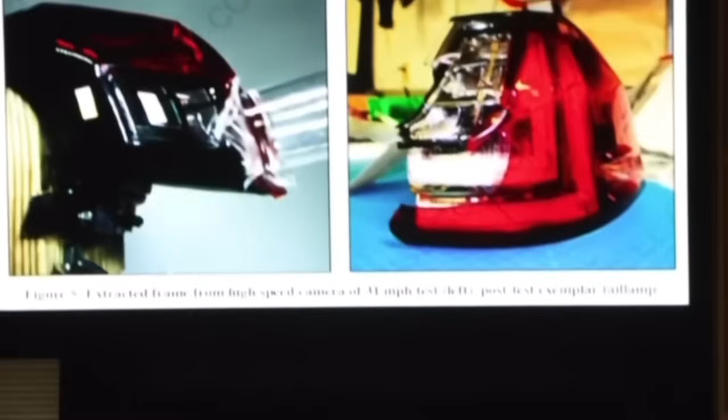Is this the photograph that was just marked as Exhibit 213 that's in front of you? Yes. Can you explain to the jurors what they're looking at? So on the left part, you are looking at a frame from the high-speed video just after the contact with the taillight. On the right, you're looking at the post-damage to the taillight after the glass had been fired into it. And if we could look at the next exhibit with the court's permission. Okay. And what are we looking at here? Same thing on the left. Again, this is the 37-mile-an-hour test.

The glass striking just in the area where the bottom of the turn signal indicator is, so right where it meets the red portion of the lens and the clear portion of the lens. That's about where the impact point was. You could see that a large portion of the outer red assembly, lens cover is missing and fractured. The clear portion of the outer lens to the turn signal indicator is also fractured, as well as the underlying clear diffusers in that assembly.

Would your testing in both of these scenarios, the 31-mile-an-hour test and the 37-mile-an-hour test, represent an accepted methodology for controlling for aim, velocity, impact site, and those issues, if you will, as it relates to testing of this sort? Yes, we were able to control those variables. And is that an accepted methodology in the area or the field of accident reconstruction?

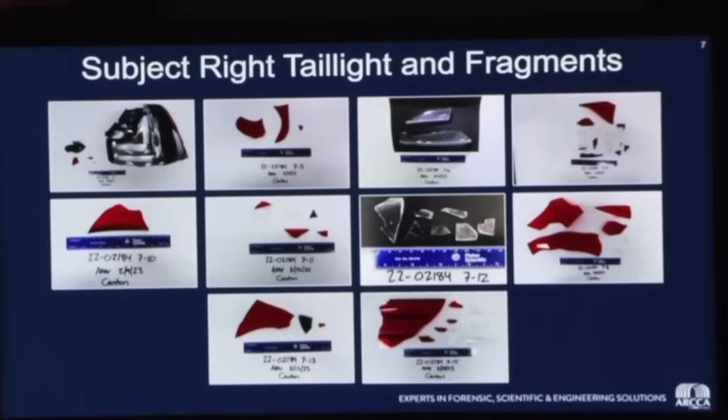What are we looking at here? This is a collection of photographs that depict various fragments from the right rear tail lamp assembly of the Lexus. And I will note, and I'll try to spotlight it, there are a few fragments in this photograph that are glass fragments, which, as I discussed earlier, there's no glass in the taillight, so these did not originate from the assembly. But altogether, from what I recall, there's about 50 fragments, I believe, that were counted, maybe a little less than that, from the right taillight. If we could go to the next slide, please.

What are we looking at here? So these are photographs depicting the sweatshirt or hoodie that Mr. John O'Keefe was wearing on the night of the alleged incident. And what was the role that this played in your analysis, ultimately? Well, one of the things that I noted, and I can go to the next slide, is there were a series of small punctures or holes in the sleeve, on the right sleeve of the sweatshirt, in varying sizes. I think some as small as just a few millimeters. Again, I think there was maybe 10 or 12, I recall, on the right sleeve of that sweatshirt.

If we could go back to the larger photo, the previous slide, do you see the right sleeve denoted on the photograph to the right? Yes. In your review of these photographs, what was the significance of the triangular arrows or markers? I believe those were to annotate or draw attention to those holes. Okay, the defects in the right sleeve? Correct. Can you count those for us, please? On the photograph on the right, I believe I see a total of 9. And what about the photograph on the left, just the right sleeve area? 9 as well.

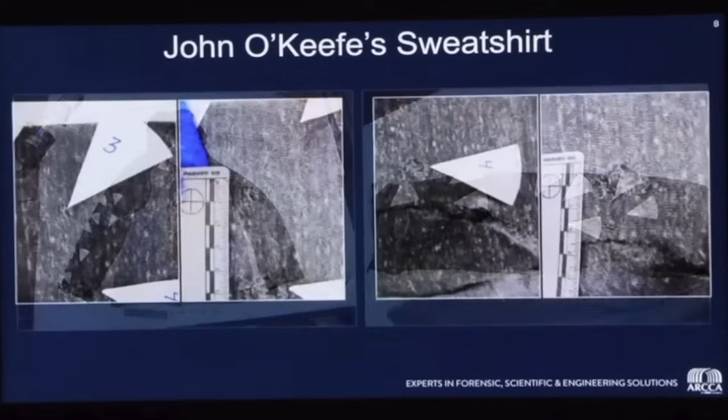If we can go to the next slide. What are the arrows pointing to in these photographs? So this is basically the previous shot, but what appears to be close-ups of some of those evidence markers. You indicated some of the sizes. What were some of the smaller sizes of those defects or holes? From what I recall, I think it was around 3 to 5 millimeters for some of the smaller ones. How big is 3 millimeters in inches? It'd be probably around an eighth of an inch or so. Can we go to the next slide, please?

What are you describing when you write the word fundamentals? So I want to discuss some very basic concepts that I hope will resonate as we go through the PowerPoint so that you have an understanding of the underlying physics. Can you describe the role of an accident reconstructionist and the fundamentals that an accident reconstructionist undertakes when performing the kind of testing that you performed? As I mentioned earlier, a simple definition of accident reconstruction is the application of physics and engineering to collision events. So I want to go through some very basic elements of that so that you have an understanding of the physics. Can we go to the next slide, please?

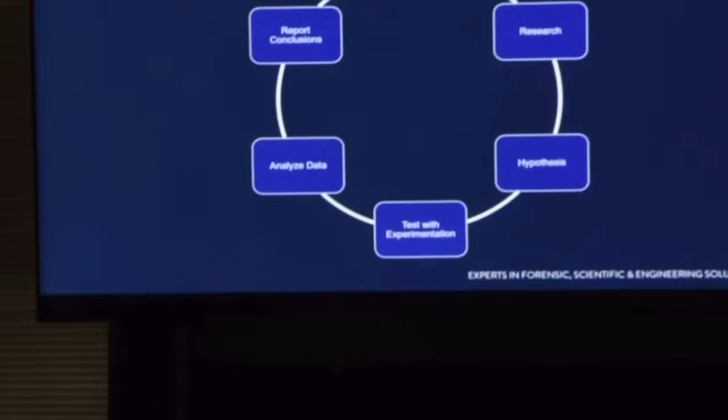You could think about it in this case, we make an observation. We have injuries to the arm, we've got a damaged taillight. So let's try to do some research to figure out, has anyone done testing with that? Has anyone hit an arm with the taillight, see what happens, see what the forces are? And then we start to make a hypothesis, kind of an if-then statement. If the arm contacts the taillight, does the taillight break? Does it not break?

What's the hypothesis there? And at least my understanding of reviewing Dr. Welcher's work, it appeared to be that his hypothesis... Sustained. Next question. Did you review... well, let me ask a different question.

Going back to the calculations previously, the delta V, the acceleration, the force calculations that you described to the jury, did you see anywhere in any of Dr. Welcher's reports or his data that he undertook those core calculations? No.

With regard to the scientific method, did you see whether or not Dr. Welcher followed this scientific method as you're explaining it to the jury? Sustained. What did you note, or what opinions or conclusions did you come to about the scientific method, if any, that Dr. Welcher did or did not undertake? Sustained.

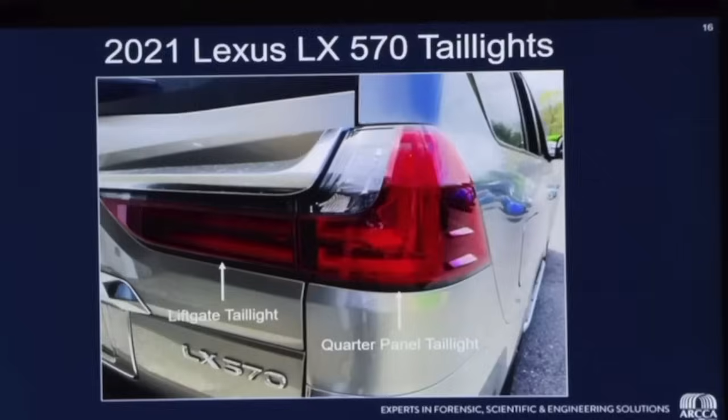And ultimately, what testing did you undertake specifically as it relates to this particular vehicle? We did full-scale vehicle testing with the vehicle driving into an ATD arm, as well as an ATD arm attached to a dummy, and then a full-on impact to a test dummy. Did you assess the damage to the right taillight after these various tests? Yes, after all of the tests. Did you assess the acceleration and quantify the forces that were involved?

Did you assess the material and textile damage to the clothed ATD? Yes. Ultimately, did you conduct lab tests in an effort to answer some of these questions as well? Yes. And you've already mentioned this, but you utilized in your testing the exemplar vehicle to the fullest extent that you felt necessary? Absolutely, yes. Were you hampered or hindered in any way in terms of damaging the vehicle or utilizing the vehicle in any way that you wished? No.

Let's go to the next slide, please. What are tests A and B? What are those laboratory tests? So these were the initial two tests that we did to get an idea of starting to test this hypothesis. As I mentioned, we weren't sure at 10 miles an hour what would happen to the taillight. We wanted to see what would happen at 17 miles an hour with the arm. So again, it was to evaluate from a starting point what happens in this interaction based upon how Dr. Welcher had his arm oriented in his PowerPoint and analysis.

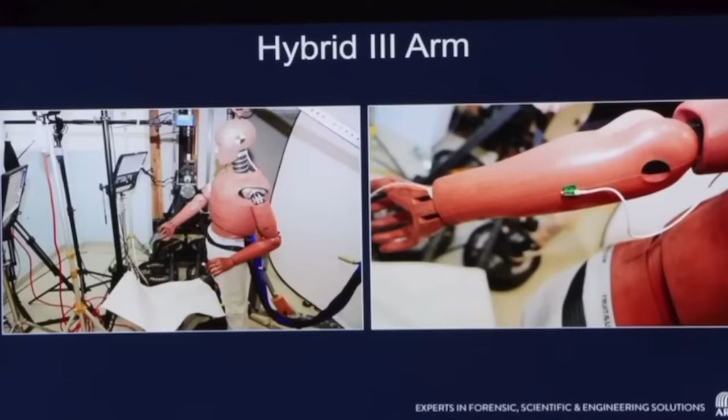Does that accelerometer put into motion some of the mathematical formulations that you talked about earlier? Yes. Let's move to the next slide, please.

Tell me about these photographs. The importance of this, more specifically looking at the right photograph, might be a little hard to see, but we wanted to get the same exact sweatshirt or hoodie for the testing to evaluate if the taillight breaks, is there a mechanism for the fragments to penetrate and cause holes in the sweatshirt as were observed in Mr. John O'Keefe's sweatshirt?

Next slide. Were you successful in finding the exact replica sweatshirt? Yes, and I will note the material blend on the sleeves are the exact same. They are 60% cotton and 40% polyester.

Was it important in your mind to maintain consistency with the data you had received concerning John O'Keefe's clothing? Certainly. I think we wanted to try to control as many variables as we could. Let's move to the next slide, please.

Test A. Describe Test A for us, please. You're going to see a series of photographs and then videos, but Test A was mounting a preconditioned taillight on that linear impactor to accelerate it into the Hybrid 3 arm, again to evaluate the damage to the taillight and the acceleration to the arm. Let's move to the next slide, please.

So what I did is I analyzed the profile of the temperature down in this area. When we look at that segment, that lower portion where contact was made, the average temperature in that area was about 34 degrees with a minimum of about 33 degrees.

How did you get that exemplar taillight down to around freezing? All of the taillights that we tested were preconditioned overnight in a freezer. Why was that important? It's my understanding that at the time this allegedly occurred, the ambient temperature was 31 degrees Fahrenheit. As I mentioned earlier, there's a correlation between how plastics perform in cold weather, so we wanted to take that variable into account and precondition them down to temperatures consistent with the time of the alleged incident.

Next slide, please. What are we looking at in this photograph? This is a video. Do you want me to go ahead and play the video? Tell us what we're about to see, and then I'll ask the court's permission.

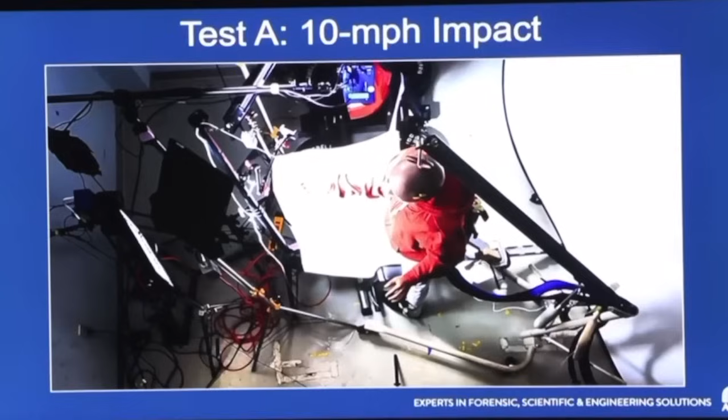You're looking at a camera mounted above the entire setup. If you look at the top portion of this video, you will see the taillight, part of it covered by the high-speed camera. What will happen is the linear impactor will fire, and the taillight will be accelerated up to 10 miles per hour, striking the clothed ATD arm. With the court's permission, let's go ahead and play the video.

Next slide, please. What is this? This is also a video, but with the high-speed camera, looking top-down at the arm. You will see, when the video plays, the taillight enter from the left and contact the arm. I will note this is essentially slow motion, so it's not happening in real time. You'll see the taillight slowly moving, but it's actually in reality moving at 10 miles per hour. Understood. Go ahead and play that.

Can I ask a question now that that's played? How did you mount the taillight to the linear accelerator? We had to get a little bit creative there, as you may have observed when we had the physical assembly out earlier. The back of it isn't a clean surface we could just bolt on. So we 3D printed a bracket that we could bolt onto the linear impactor, and used a polyurethane expanding foam to marry those two together so we could bolt it onto the linear impactor for this test.

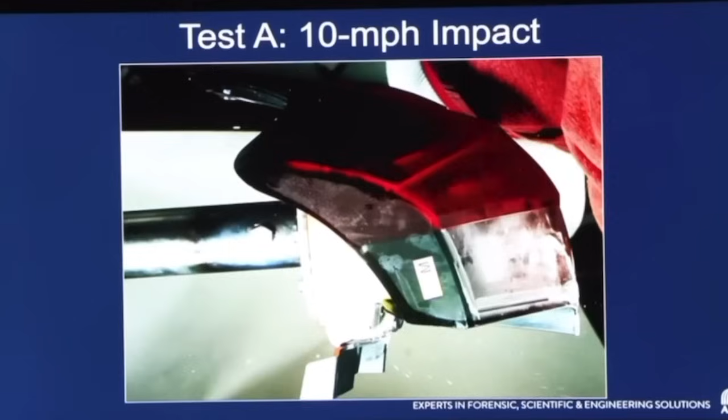Did you see any debris from that foam mounting mechanism? Yes, there are a few flakes of that polyurethane foam off the backside that got dispersed. With regard to this particular 10-mile-an-hour test, what did you note in terms of damage to the taillight? It was very minimal. What about any damage to the hoodie? There was none.

Can we go to the next slide, please? What are we looking at in this slide? This is looking at a side view, same test, just from the side. Similarly, you'll see the taillight come from the left and impact the arm. If we could play this, please.

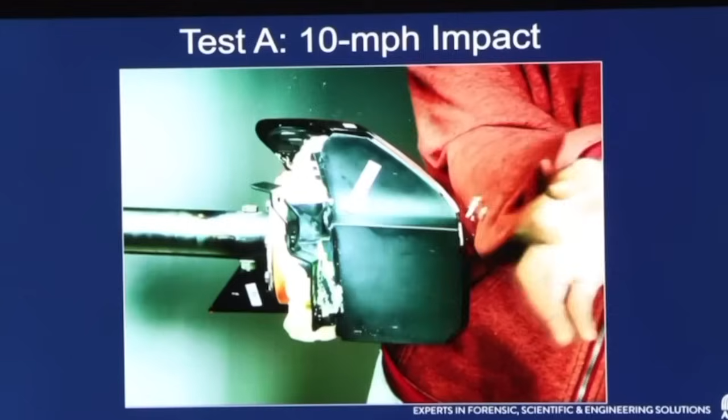What did you note in terms of deflection of the test arm? The arm essentially, and we'll see this in the data later, reaches a common velocity with the taillight. Based upon the portion of the arm that was contacted, consistent with how Dr. Welcher has it oriented, it will become accelerated up to 10 miles an hour roughly. Over approximately what period of time is that arm accelerated up to 10 miles an hour along with the taillight? We'll see it on the data plots. I think it's about 10 milliseconds or so.

How long does an eye blink on average take? Off the top of my head, no, I don't know. Probably pretty quick, somewhere around 250 milliseconds. Does that sound right?

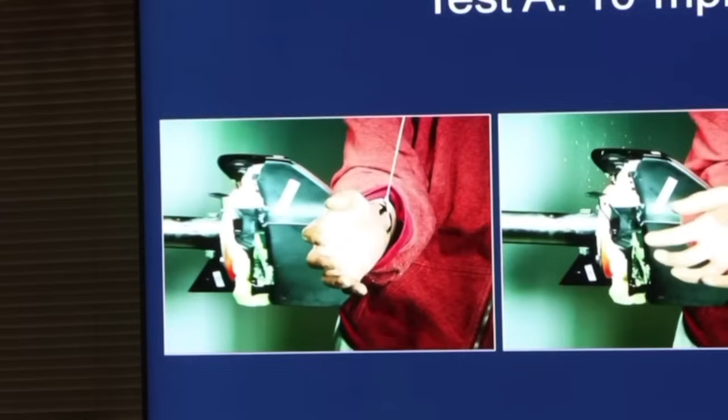Let's move to the next slide, please. What are we looking at in this series of photographs? These are extracted frames from the high-speed video we just saw on the previous slide, showing just at contact, just after contact, and then post-contact, so you can see the kinematics of the arm and how it is moving.

How would you describe the damage to the taillight in the 10-mile-an-hour test? If I may go to the next slide, I think it might help. This was the totality of that damage at 10 miles per hour. So I would describe it as minimal and superficial.

Do you hold that opinion to a reasonable degree of scientific certainty? Yes. As well as the former opinion you just gave us? Yes. Next slide, please.

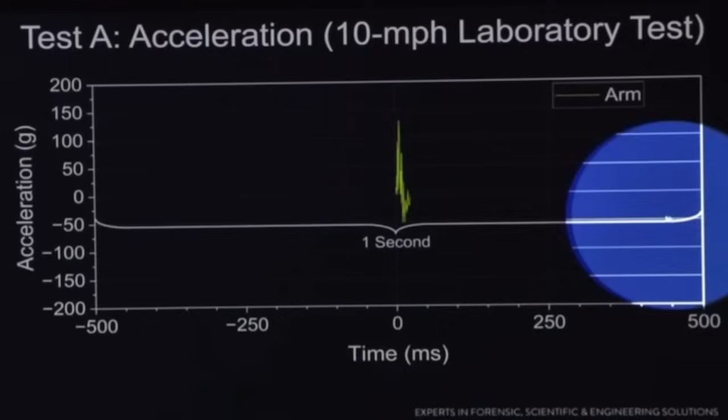So if we go 500 milliseconds to the right, 500 milliseconds to the left, this whole graph represents 1 second in time. This impact duration is occurring very quickly. Is that 1 second reflected from the beginning of the graph to the end? Correct, starting at this y-axis all the way to here is 1 second in time, with our impact duration happening over just a few milliseconds. And this was at 10 miles an hour? Yes.

And what does that mean? What is a G? A G is acceleration due to gravity. So if we're being held down by 1 G, you could think of it as basically a multiplication factor—it's 131 times the acceleration due to gravity.

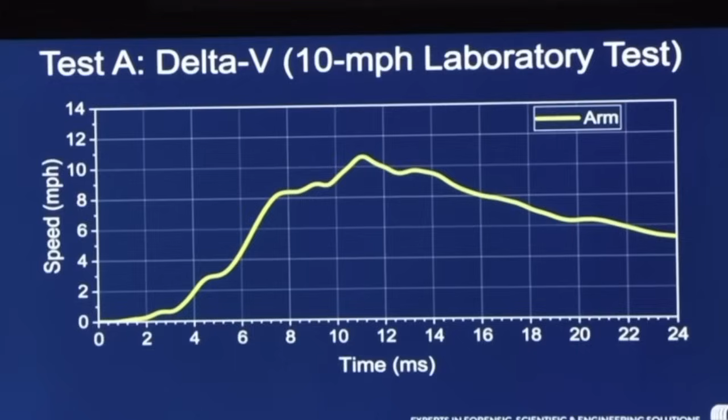And 131 times the force of gravity is exerted on the arm at the same time? Sustained to that point. Where does gravity play into this—what is the 131 Gs, where's that force exerted? That is the acceleration the arm experienced as a result of that impact—that's how quickly it was changing in speed. Understood. Let's go to the next slide.

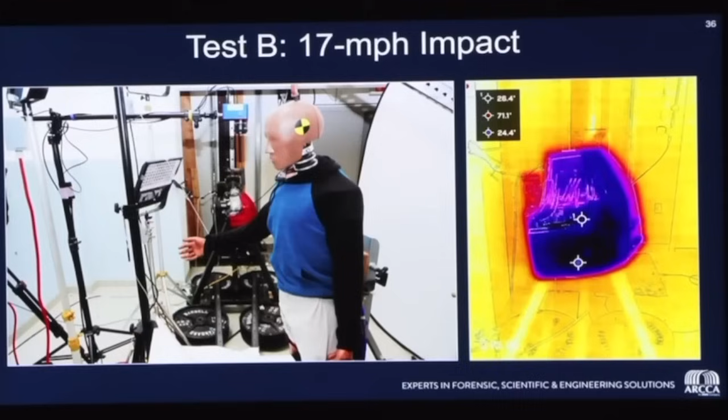And the ATD, the test dummy, if you will, is it also clothed? Correct, yes. You may notice a difference in the sweatshirt color. We put on a new sweatshirt in this test. Was it also an exact replica of the sweatshirt at issue worn by John O'Keefe? I'll ask it a different way. How did it compare to the sweatshirt that was worn by John O'Keefe? It was made by the same company and had the same material blend as the previous test and the one that Mr. John O'Keefe was wearing.

Next slide, please. What are we looking at here? So this will be a video. You will see, much like you did in the other one, where the taillight will be accelerated up to 17 miles an hour, impact the arm. And one of the things you'll see is actually an artifact of the test, if you will, where the taillight, due to the fact that the impactor stops at the end of the stroke, that force actually causes it to decouple from that polyurethane foam that we use to adhere the two.

What do you mean by decouple? What does that mean? So, as I mentioned, once the linear impactor reaches the end of its stroke, it stops instantaneously, and the force of that stop just caused where we adhered the two together to detach, basically break away. So, in essence, it doesn't matter because we only care about that short duration of time, that 10 milliseconds. So, once it breaks, it's already reached a common velocity to the taillight. Okay. Can we go ahead and go to the next slide, please?

What do you note about this impact? So one of the things you'll see is kind of that dust cloud. Again, that's all the particulates from the expanding foam that we use. So that's kind of what you see in the background there, going over the arm and the taillight there. Do you note more damage or less damage to the taillight at 17 miles an hour versus the 10 mile an hour test? There is more damage, yes. Let's go to the next slide, please.

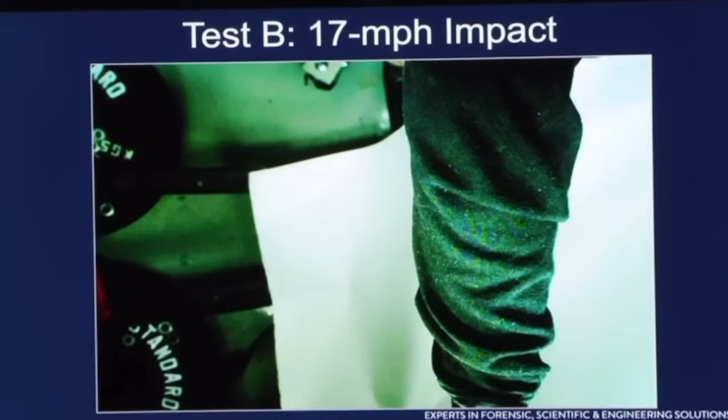What are we looking at here? So you're looking at a top-down view from the high-speed camera. You'll see the taillight enter from the left, impacting the arm at about 17 miles per hour. Okay, go ahead and play it.

Can you describe the decoupling that's shown here? Absolutely. So as you can see where the two are basically married together, right? It's kind of actually coming back together now. So that bond that we had, this is the most effective way that we could mount it to the impactor. It just became detached due to the force of that impactor stopping at the end of the stroke. Understood. Next slide, please.

What are we looking at here? So in this slide, you're looking at another high-speed video. This is just a side view. Again, you're going to see the taillight enter the frame from the left, impacting the arm at 17 miles per hour. Is this in slow motion as well? This is in slow motion, correct, not real time. Okay.

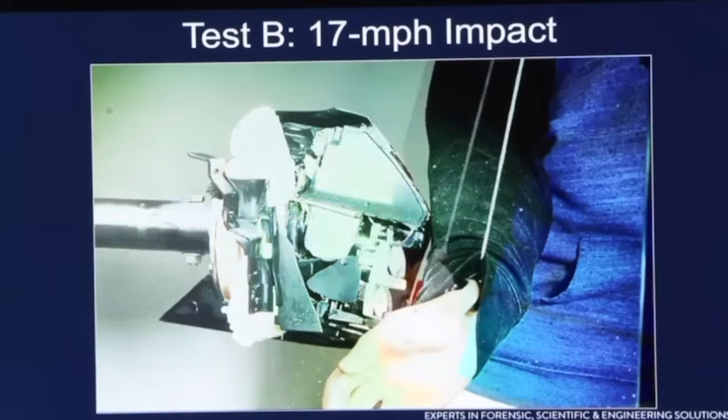What do you note in terms of the deflection on the arm? The arm, as we saw in the previous one, is accelerated up, so it's moving now at roughly a common velocity with what the impact speed was. And what did you note about the damage to the taillight? It was more significant than the 10-mile-an-hour test, where there was very minimal damage; several fragments of that red outer lens fractured as well as the clear lens. Okay, next slide.

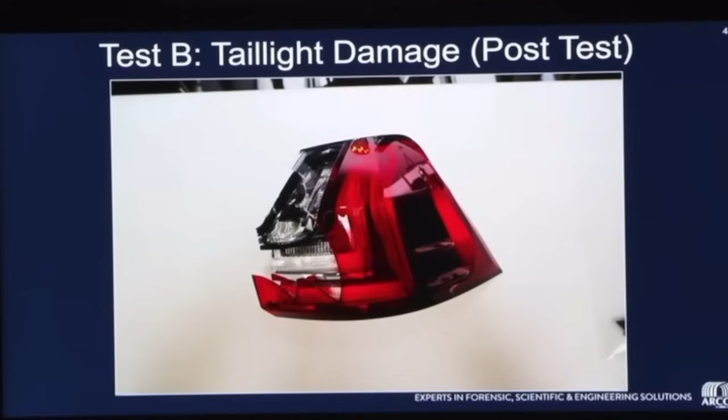What is this a photograph of? This photograph is depicting the damage to the taillight at the conclusion of the test, where, again, it's missing fragments of the outer red lens. I will note that the interior diffusers and plastic components are intact in this test. When you say intact, what do you mean? They are not damaged or broken. At all? Correct, at all.

And I'll point out one other thing just because you can see it in the photograph. This is that 3D printed bracket that we used to bolt it onto the linear impactor with the foam on the other side that mounted it to the taillight. Thank you for that. Next slide, please.

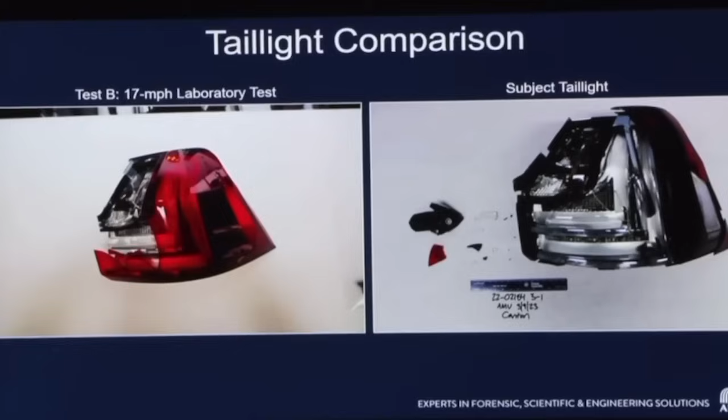What is this a picture of, or pictures of? This is a side-by-side comparison showing a depiction of the 17-mile-an-hour test impact to the test taillight, comparing it to that of the subject taillight. Were you able to reach any conclusions or opinions as to whether or not the damage to the subject taillight on the right is consistent with striking an arm at 17 miles per hour? It's inconsistent from a damage perspective. What's the basis of that opinion? The test that I've just showed you all.

Was that testing that we've just talked about conducted in accordance with the scientific literature and generally accepted methodologies that you've earlier described? Yes. Is the damage to the right rear taillight consistent with striking John O'Keefe's arm at 17 miles per hour? No. Do you hold that opinion to a reasonable degree of scientific certainty? Yes. Slide 45, please.

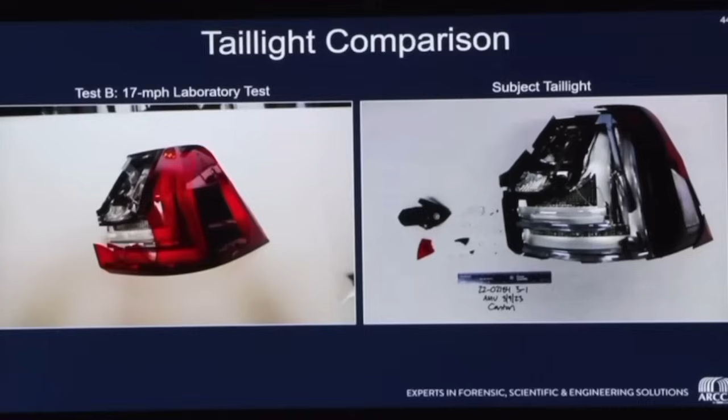Based on this testing that you conducted in this case, is the damage that you saw of the shirt that John O'Keefe was wearing consistent or inconsistent with the shirt that's on the ATD? It was inconsistent compared to the sweatshirt that Mr. John O'Keefe was wearing. Based on that, do you have an opinion or a conclusion as to whether or not the damage on Mr. O'Keefe's clothing was consistent with being struck by the right rear taillight at 17 miles per hour? It is inconsistent. Next slide, please.

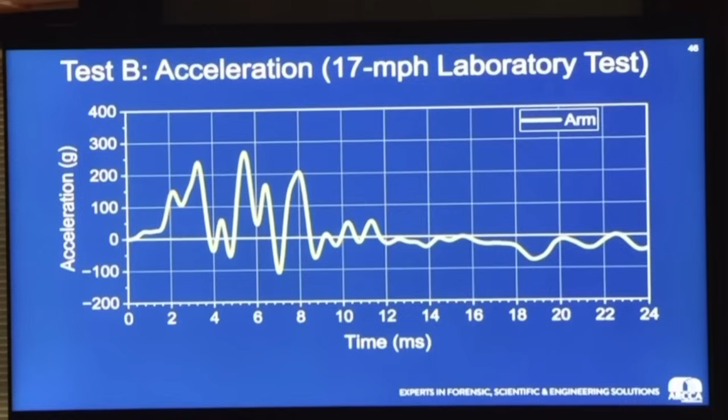Did you conduct additional tests other than the 2 lab tests that we've talked about? Yes, sir. Describe just in general, and then we'll talk in more specifics. What were the tests that you undertook after the lab tests? So we conducted 2 tests with a suspended ATD arm that was impacted by an exemplar 2021 Lexus LX570. We then conducted a test where the arm was then attached to a test dummy, and then our final test was a full-on impact to a test dummy. Can we go to slide 48, please?

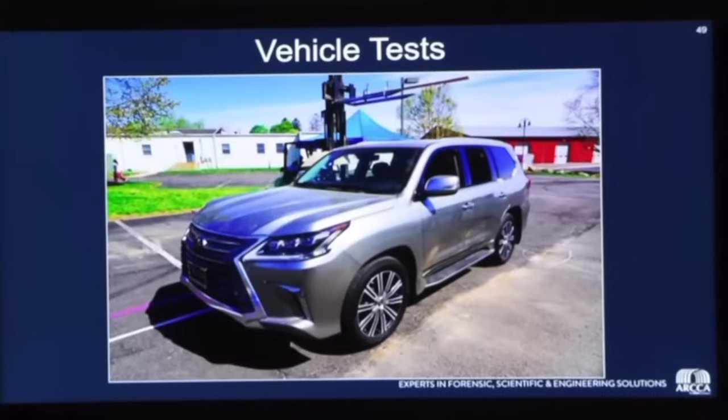What are we looking at in this slide? This is the exemplar 2021 Lexus LX570 that was utilized during this test program. Was this the same vehicle that was utilized in all the tests, C, D, E, and F? Correct, yes. If we could go to slide 49, the next slide.

What's depicted in this photograph? Well, there's a number of things here, so I'll try to point them all out. Obviously, we talked about just now the Lexus here, the exemplar vehicle. We have a forklift that was hoisted up that ultimately was suspending the arm. I think I have an additional photograph that shows it close up. But the arm was suspended from the forklift at the correct height to interact with the taillight.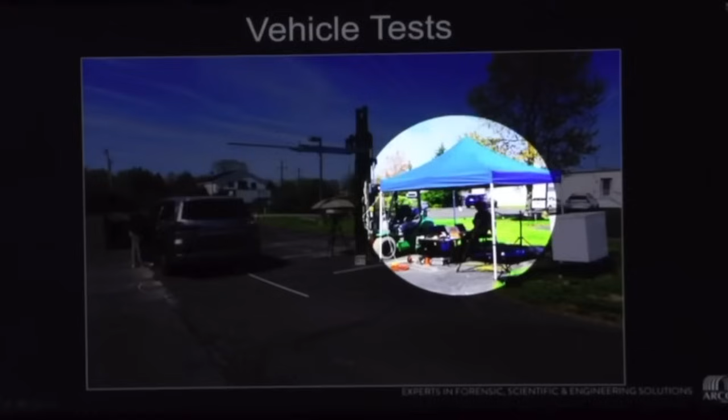We have our high-speed cameras set up under this umbrella. There's another one over here. Another thing you'll note is we brought out the chest freezer when we were installing these in the Lexus to, again, keep them at that steady state temperature for as long as possible. If we could go to the next slide, please.

What are we looking at in this photograph? So this is the approximate position that we plan to have contact occur in these tests. As you can see, the forearm is in contact with the lift gate and the quarter panel taillight along with the elbow. Why did you choose this configuration for the arm, the forearm, the hand, the elbow? It was based upon my review of Dr. Welcher's work, that he did through his static and dynamic test or paint test, that this is how the arm was roughly oriented when the alleged contact occurred.

What were you trying to replicate in positioning the arm this way, as it relates to the SUV? Well, as I stated earlier, it was to understand, let's get beyond just simple geometry, aligning things. What happens to the arm, right? What are the accelerations? What's the damage? We want to answer some of those other questions that Dr. Welcher didn't answer.

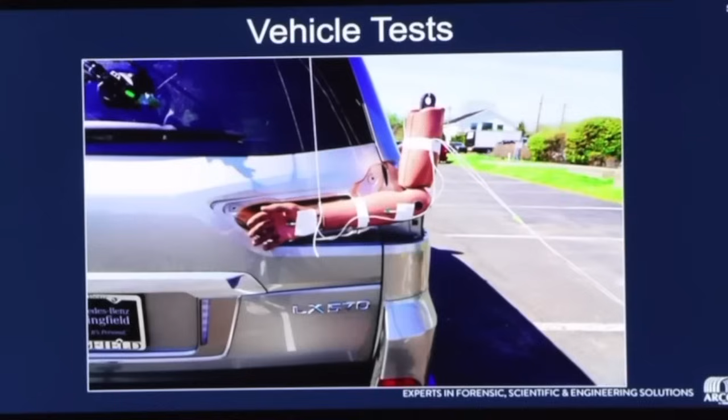Does this... So I'm going to strike the last part of that answer. Does this configuration align with your understanding of Dr. Welcher's alignment of the arm as it relates to the vehicle? Okay. Sustained. May we approach, Your Honor? Yes. Thank you, Your Honor. May I inquire? Yes. Okay. Let's go to the next slide.

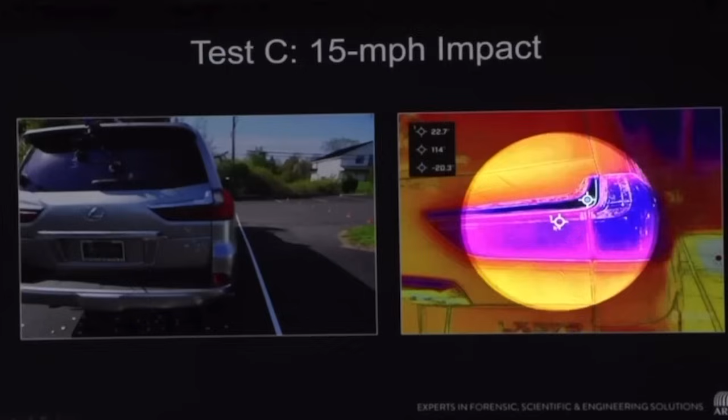It's maybe self-explanatory. What was the speed of your first test out in the field? 15 miles per hour. Next slide, please. What are we looking at in these 2 photographs? On the left is a photograph of the installed preconditioned taillights just after the install, and on the right is a thermal image of that. And if I may just point out with the temperature, one of the things you may see here is that due to the reflective chrome, this is just an artifact of that being really reflective. When we look at the average temperature profile of the taillight for this test, the average was approximately 17 degrees Fahrenheit.

Was it important in this testing to account for the temperature variance of the taillight assembly? Yes, absolutely. And we certainly strive to maintain that. One of the things you may see in this photograph on the left are these pellets on the ground, and that is due to the fact during the installation process, one of my colleagues was positioned adjacent to the taillight fixtures, applying a compress of dry ice to help mitigate any heat transfer during the install process. Let's move on to the next slide.

What are we looking at in this overhead view? It's a drone video, so you're going to see the Lexus accelerate from left to right, impacting the hybrid suspended arm in the area where you could see the umbrella. Can you use your spotlight and orient us? Where are the vehicles and the testing locations? Yes. The Lexus is starting here. You will see it accelerate in reverse with the hybrid arm suspended in this area here. Okay. Is this a video or just a still shot? This is a drone video. Let's go ahead and play that.

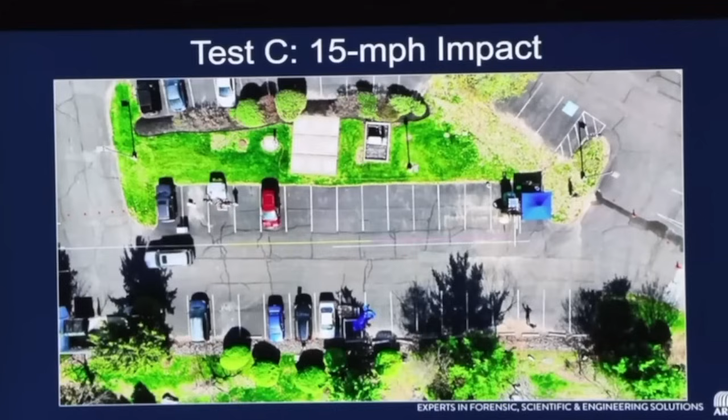Dr. Wolfe, is that in real time or slowed down, sped up? This is in real time. Okay. Next video, please. What is this? This is a camera that was mounted on top of the forklift that was suspending the arm. Is this a still shot or is it a video? It's a video. What is the orientation of that arm as it relates to the vehicle that we'll see? It will make contact with the taillight, although I will note in this test, ultimately the contact ended up being more of a clip or a side swipe. Go ahead.

Did you see the impact area? It's quick. What did you mean when you said more of a side swipe or a clip? I think the next couple of videos will help demonstrate that. Let's move on to the next one.

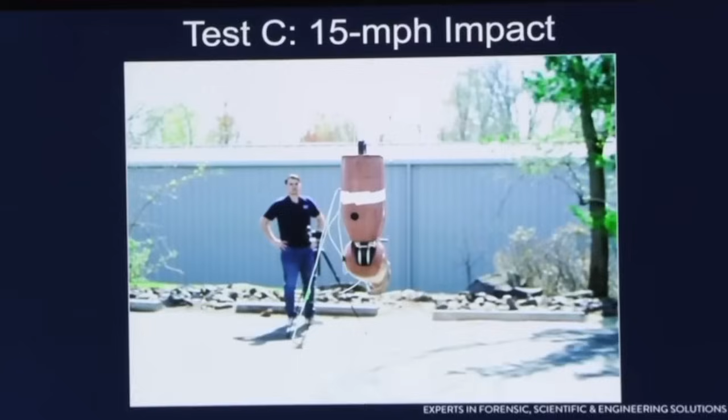What are we looking at in this photograph? This is going to be a high speed, or slow-mo, video. You're going to see the Lexus come in from the right and move across the screen to the left, and you'll see contact occur between the taillight and the arm.

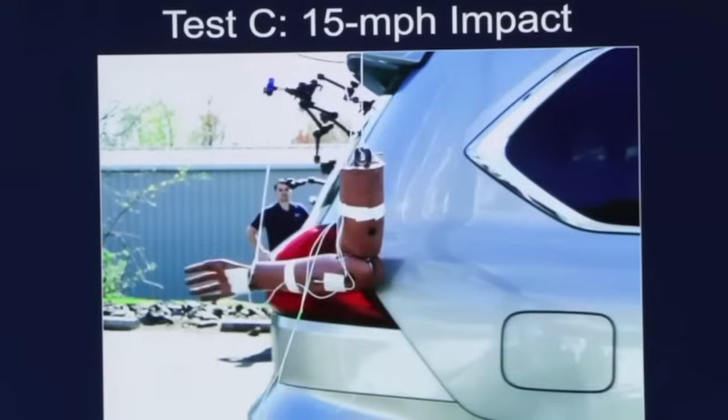Can you explain for the jurors using this video what you meant by more of a side swipe or a clip? This is where the hand and the wrist are kind of in the area of the quarter panel taillight, and a portion of the forearm in contact with, I'm sorry, the wrist and the hand in contact with the lift gate portion of the taillight, and the forearm is more in contact with the quarter panel taillight.

Okay, can we move to the next slide? And what is this angle? This is the same test, just a different angle with the high-speed cameras in slow motion. And this is at 15 miles per hour, correct? 15 miles an hour, correct.

Can you explain for the jurors, given the fact that this is suspended, does that have any impact on the ultimate analysis or reconstruction, rather than being attached to an ATD? Effectively, mass is mass. So whether we have an arm that is suspended or attached, again, the arm is on a joint, right? So the arm can accelerate freely of the rest of the body. If anything, even if it is attached to the body, there may actually be some additional force associated with that, just because there could be more mass attached to it.

Understood. Okay, let's go ahead and play this video.

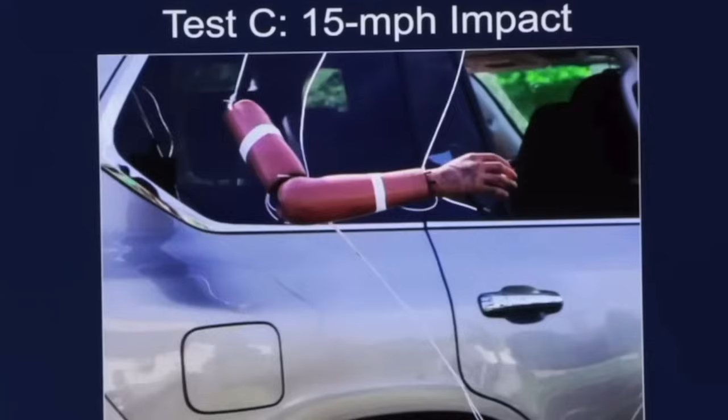Understood. Next slide, please. What are we looking at here? This is a photograph of the test vehicle subsequent to the test, depicting the lack of damage to the taillights. Describe what you did see in terms of damage or lack of damage on the taillight. There was no damage or fracturing to the taillights.

Describe the orientation of the arm in this particular test that you said was more of a side swipe. What was the orientation of the arm to the taillight in terms of how much of the arm touched the taillight? It's probably a clunky question, but I think you understand it. I don't know if I could break it down into percentages, but qualitatively speaking, it appears to be the hand and the wrist and the lower portion of the forearm, maybe to the mid forearm or so.

So nothing on the upper arm? Correct. Making contact? Correct. Nothing on the upper arm, yes. Okay, if we could move past this slide and onto the next slide.

What is this depicting? This is depicting the test taillights of the 15 mile per hour impact into the hybrid arm compared to that of the subject taillight. Was there any notable damage at all on the exemplar taillight following test C at 15 miles an hour? The only thing there may have been was some very slight abrasions maybe to the plastic, but there certainly was no breaking or fracturing of the lens assembly.

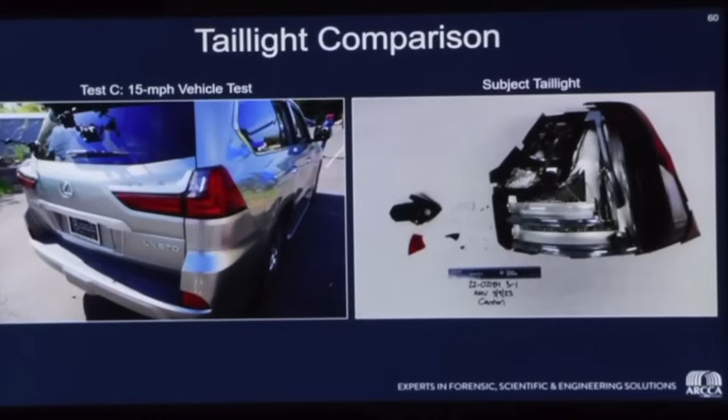Was that testing done in accordance with scientific literature and generally accepted methodologies in the area of accident reconstruction? Yes. Is the damage to the right rear taillight of the subject vehicle consistent with striking John O'Keefe's arm at 15 miles per hour in a side swipe configuration? It's inconsistent. Do you hold that opinion to a reasonable degree of scientific certainty? Yes.

What was the arm or appendage outfitted with to determine the data on this graph? If you think back to the lab testing we did, that's kind of why we did the testing incrementally. In the lab test we didn't have a way to mount the lift gate assembly to evaluate that interaction. So when we moved to the full-scale vehicle testing, we had a lift gate taillight and the full vehicle, so we also instrumented the hand with an accelerometer as well as the forearm. We were able to measure the acceleration of both the hand and the forearm in these tests.

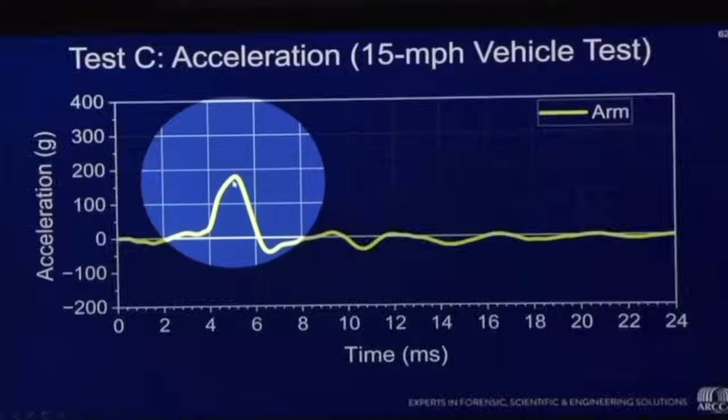Understood. Test D, what was the speed that you undertook in test D? So this is a 29 mile per hour impact into the suspended hybrid arm.

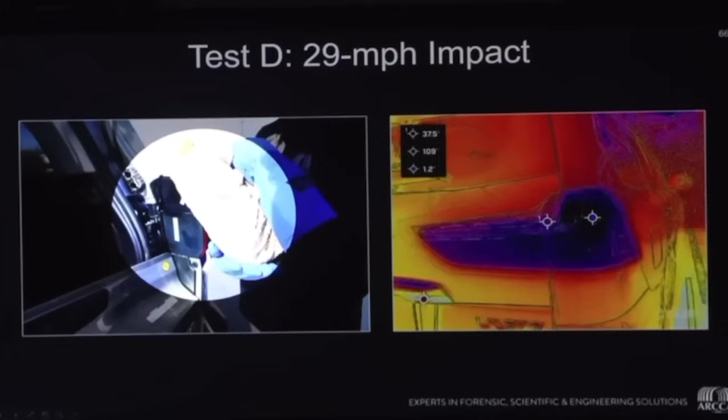What are we looking at in this series of photographs? On the left is my colleague compressing the taillight while we install the upper liftgate taillight, again trying to maintain that steady state temperature. On the right is the thermal image of the taillight after the install. The average temperature of this taillight during the test was approximately 37 degrees Fahrenheit.

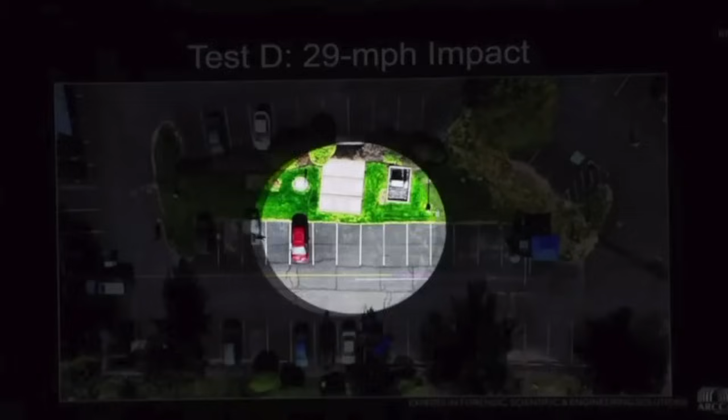Staying with test D, what is this depicting? This is a drone video showing a top-down perspective of the test, with the Lexus starting on the left-hand part of the screen, accelerating in reverse into the suspended hybrid arm over here at the location of the forklift. Okay, if we could watch this video, please.

Do your next slides show, there you go, the suspended arm. What are we looking at here? So this is a video camera positioned on top of the forklift looking down at the arm, so you'll see the vehicle move from bottom to top as this video plays.

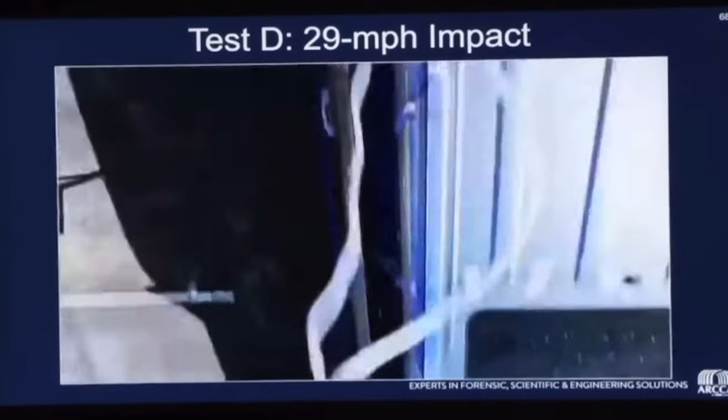By the way, Dr. Wolfe, what are the purple and white lines that we see? I'm sorry, I was talking over that. What are the purple and white lines that we see? So those are guidelines to help. I will note that this is kind of like a needle in a haystack, it's very hard to hit this small of a target. So it just served as a guideline to reference as we're accelerating rearward into this.

Is this in real time? This is in real time, yes. What's the speed the vehicle is entering the frame at? 29 miles per hour. Thank you. What happened to the arm in terms of its suspension? It actually gets ripped off from the mounting location.

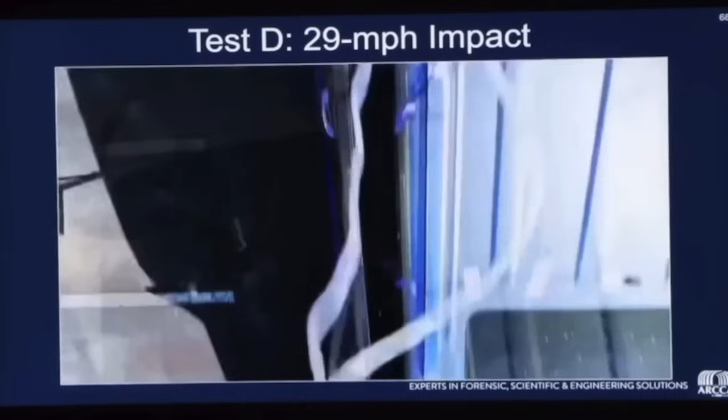Is there a reason you believe physically that the arm was ripped off from the suspension tethers? Well, certainly there was enough force to break the tie lines to the forklift. Was there a test value of those tie lines? I think they were rated at 150 pounds.

What does that suggest in terms of the force that was exerted on the arms to tear off the tie lines, just before we get to the other testing? Well, it indicates that the arm saw at least 150 pounds of force.

What are we looking at in this video? This is going to be a slow motion video. You'll see the Lexus accelerate in reverse, making contact with the arm. Again, this is the 29 mile per hour impact test.

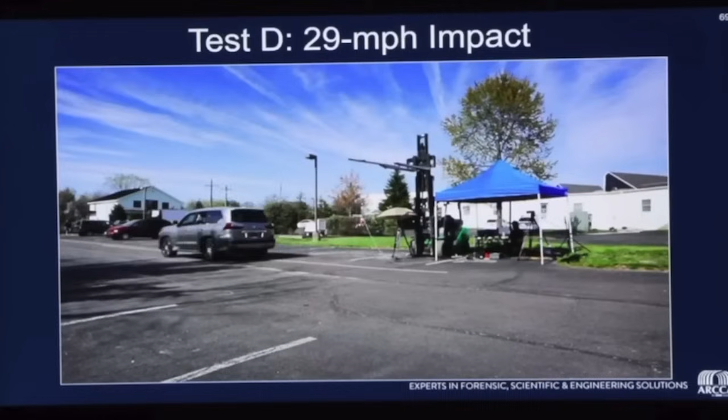What is this? This is a high-speed video, slow motion of test D at 29 miles per hour into the ATD arm that is suspended. You'll see the Lexus enter the frame from the right and impact the arm.

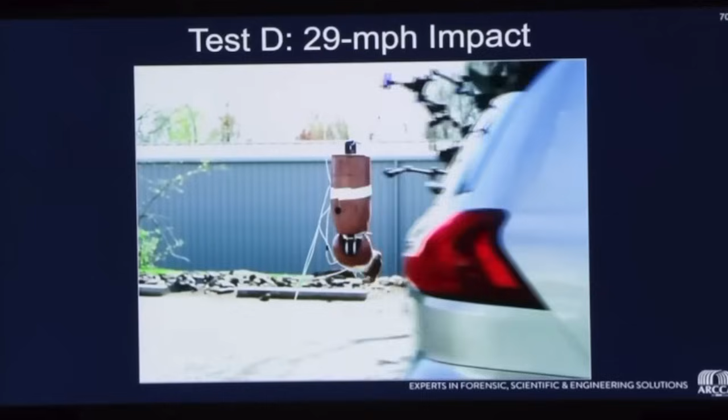Was this strike more reflective of what you were attempting to replicate? Yes, this was a more central impact to the arm, yes.

What is this? This is a high-speed or slow-motion video depicting the test D at 29 miles per hour, just a different perspective than the previous video.

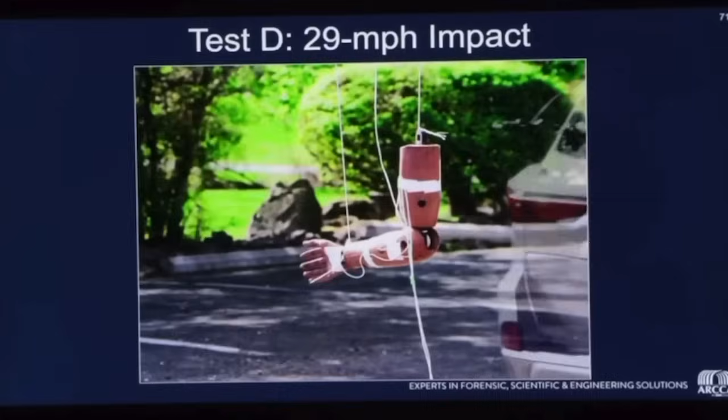Is that more or less consistent with what you saw in Dr. Welcher's test where he had his arm in that still shot associated with the geometry of the car? Is this consistent with what you were trying to replicate after your review of Dr. Welcher's report? Yes. What were you trying to replicate at the 29-mile-an-hour test in this particular orientation? We were trying to see, based upon Dr. Welcher's orientation, what happens to the arm in terms of the acceleration and the damage to the taillight at that configuration at contact.

What are we looking at? This is a photograph depicting the damage to the liftgate taillight as well as the quarter panel taillight. On the liftgate taillight, a significant portion of that thick 5mm red outer lens is fractured and broken off. The underlying diffusers are still in place. There was a small crack in, I believe, the upper diffuser. The quarter panel taillight had the clear section damaged with the outer lens missing, along with some fragments from the outer portion of the red part of the lens.

What are we looking at in this slide? This is another photograph depicting the quarter panel taillight. As I indicated, there are portions of the red lens cover missing. The interior diffusers remained largely intact in this test.

What is this side-by-side depicting? This is showing the results of the 29-mile-per-hour impact test to the test vehicle compared to that of the subject taillight. Given that orientation of test D, were you able to reach any opinions or conclusions as to whether the damage to the subject taillight is consistent with striking an arm at 29 miles per hour? It was inconsistent. What's the basis for that opinion, Dr. Wolfe? The results of this test.

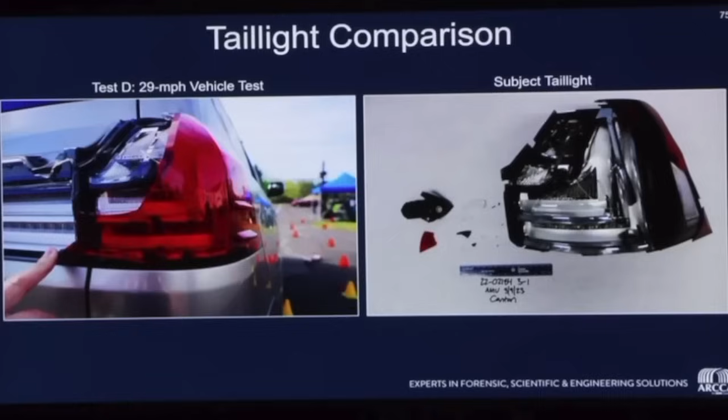Was that testing conducted in accordance with the scientific literature and generally accepted methodologies in the field of accident reconstruction? Yes. Is the damage to the right rear taillight of the subject vehicle consistent with striking John O'Keefe's arm at 29 miles per hour? Do you hold that opinion to a reasonable degree of scientific certainty? Yes.

Next slide, please. What are we looking at in this graph? This is the acceleration of the arm, reaching peak acceleration of about 500 Gs.

You indicated 800 Gs in the last graph. What's the difference in the delta between the 500 and the 800? Between the hand and the arm? Understood. Which one suffered or was subject to 800 Gs? That would be the hand. And which one was subject to the 500 Gs? That would be the arm.

Next slide, please. Test E, 24 mile an hour impact test. What is that? So this is a 24 mile an hour impact test to the ATD arm attached to a test dummy. Next slide, please.

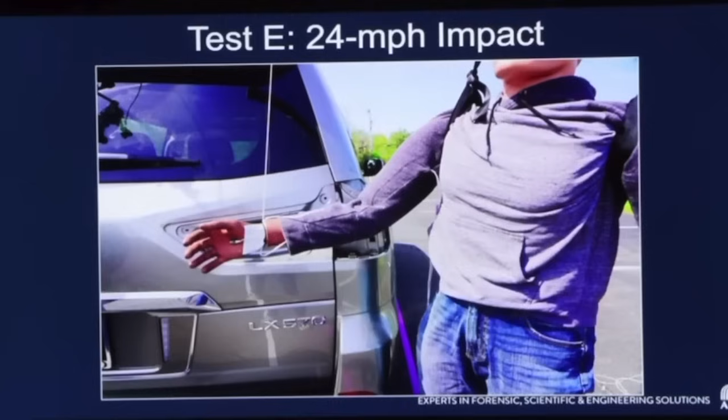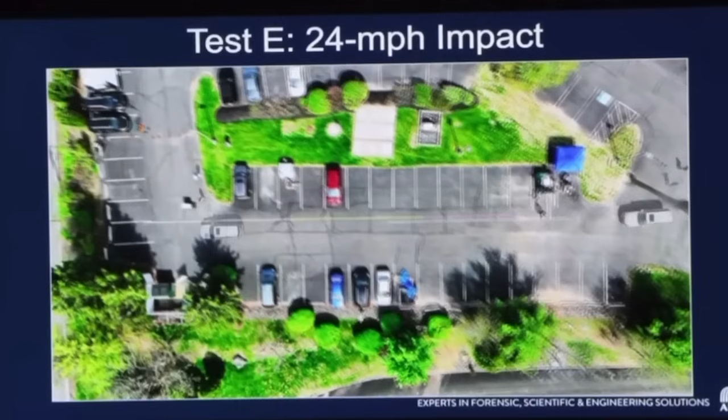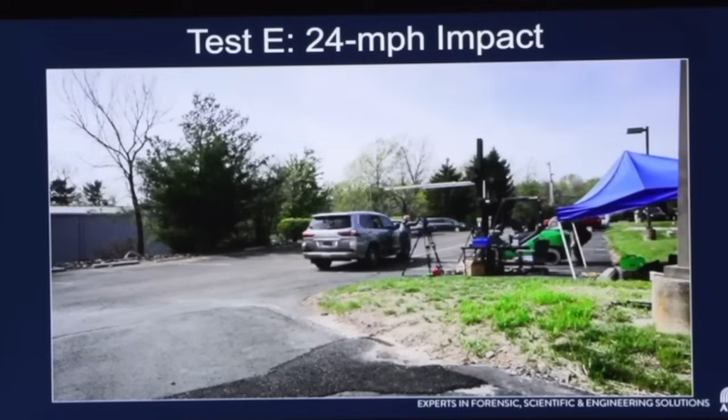Could we go to the next slide, please? And what is this? So this is a perspective from the high-speed camera, a slow-motion video with the Lexus reversing into the ATD arm at 24 miles per hour.

Before you play this, Dr. Wolfe, I failed to ask this - it may be obvious. After each of the tests, C, D, E, F, were you replacing the taillight with new exemplar taillights that had been temperature accounted for? Yes, every test had a new set of quarter panel taillights as well as liftgate taillights. And even in the test at 5 miles an hour where the taillight was not damaged, we still put on new taillights. We did not repurpose or reuse any of the taillights.

Okay, thank you. If you could play this for us, please.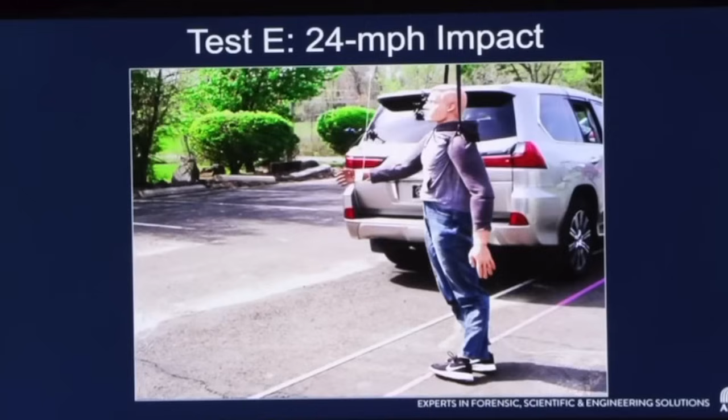In this configuration, was the ATD outfitted with the hoodie you described earlier? Yes. Before this test, did you confirm whether the right sleeve was damaged or undamaged? Before the test, it was undamaged.

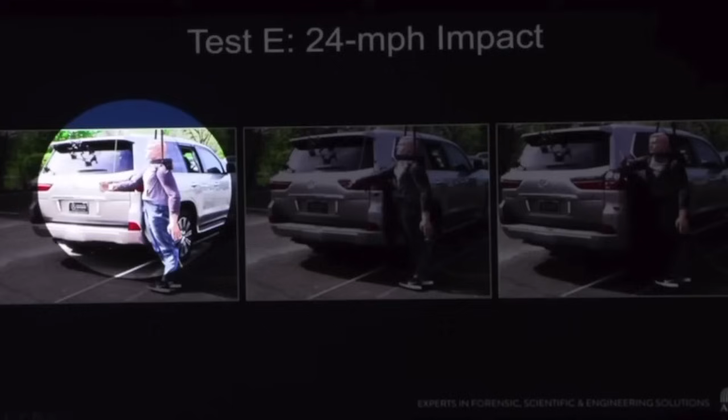What are we looking at in this slide? These are still frames from the high speed video. Starting on the left, just at contact, the forearm makes contact with the liftgate taillight, then the upper forearm and elbow make a direct hit into the quarter panel taillight. The middle is just after contact, and the right is post contact.

Next slide. What are we looking at in this picture? This is an overall photograph depicting the taillights subsequent to this test at 24 miles per hour. I'll note there's no damage to the liftgate taillight, but there is damage to the quarter panel taillight.

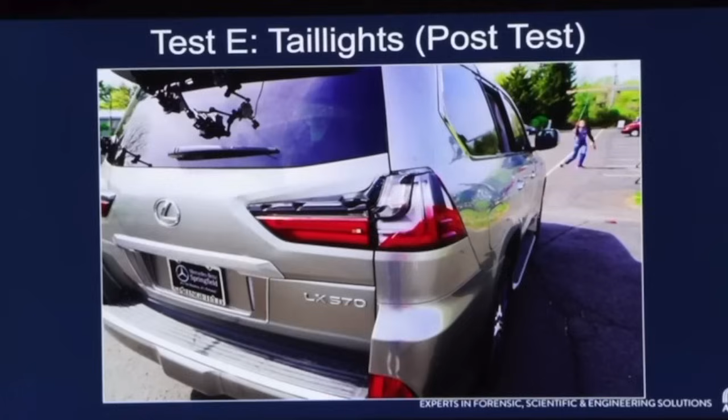Is there any damage to the internal diffusers on this taillight? If I go to the next photograph, you can see here there's a thicker line, but it's actually not a crack. I'm looking at the clear diffuser with the dots you see. This line you see is opaque and is part of the assembly, just how the plastic is molded. There's a very small crack right here in the underlying diffuser, but all of the remaining part of the diffuser, this portion here and here, are all intact, and same with this portion of it.

What about the chrome piece running between the diffusers? I don't believe that was damaged during this test. And what about the clear acrylic toward the top left of that taillight housing? It was partially fractured, but not the entire outer portion of it.

Next slide. What is this depicting? This is a photograph depicting the quarter panel taillight subsequent to the 24-mile-an-hour impact test with the ATD arm, compared to that of the subject taillight. Based on this test, were you able to reach any opinions and conclusions as to whether the damage to the subject taillight is consistent with striking John O'Keefe's arm at 24 miles an hour?

Sustained in that form. Were you able to reach any opinions or conclusions as to whether the damage to the subject taillight is consistent with striking an arm at 24 miles per hour? Based upon the test results, it's inconsistent with striking an arm.

On what do you base that opinion? I base it on the test results I've shown in terms of the video and data acquisition. Can you describe that in more detail? During this test, we had the instrumented hybrid arm outstretched from the test dummy with accelerometers on the hand and forearm. We had data acquisition on the vehicle monitoring its speed. We accelerated the vehicle into the arm at 24 miles an hour to conduct a dynamic impact test, collecting data about the acceleration the arm experienced, and also making observations about the damage we observed to the taillight.

Do you hold that opinion to a reasonable degree of scientific certainty? Yes. And were your tests conducted in accordance with methodologies generally accepted in the field of accident reconstruction for this particular test cycle? Yes. Next slide, please.

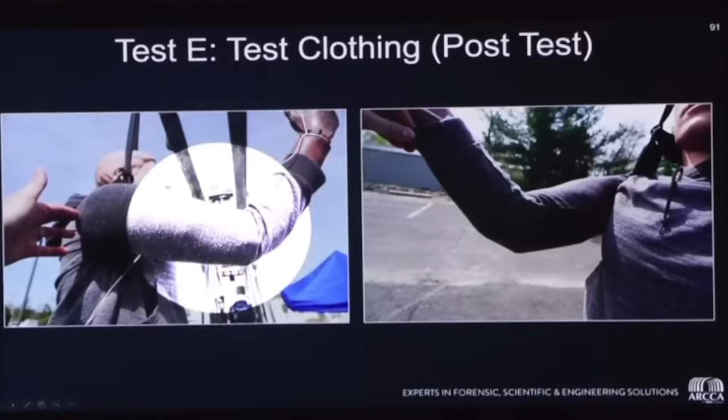What are we looking at in this series of photos? These are photographs depicting the test clothing. Again, prior to the test, there were no holes or damage to the sweatshirt, and that was the same post-test. We did not observe any fraying, holes, or punctures to the material of the sleeve. Was there any damage whatsoever observed on the right sleeve of the ATD? No.

Next slide, please. What are we looking at in terms of this graph? This graph shows the acceleration of the hand, reaching a peak acceleration just after 10 milliseconds of approximately 435 Gs.

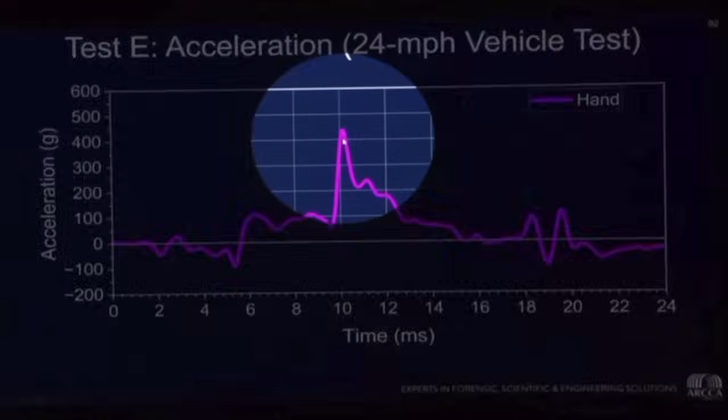Next slide, please. And what is this delta V showing us? This is showing the change in speed of the arm going to about just over, looks like about 22 miles per hour at about 10 milliseconds. So total window of time of about 8 milliseconds that it took to get up to that 22 mile an hour speed or so. Understood. And next slide, please.

Another question on that: when the ATD was oriented in test E, where it was standing with its right arm out, and the impact was on the right arm, what happened to the mass of the body of the ATD? It rotated. Was it projected at all off to the side? No. Was it projected rearward? No. Was that rotation expected based on your experience? Yes.

What is the 29 mile an hour impact test in test F? So this was a test that we conducted with what's known as a rescue Randy or a test dummy. That was a full-on impact to the right rear corner of the Lexus. Let's take a look at the next slide, please.

With regard to test E, if I could please ask you about that. I will go back to that test even though we're looking at this one. With test E, was that reflective of a direct impact on the arm itself? Correct, right in the area of the elbow to the quarter panel taillight. As opposed to a side swipe on the arm? Correct, yes. Thank you.

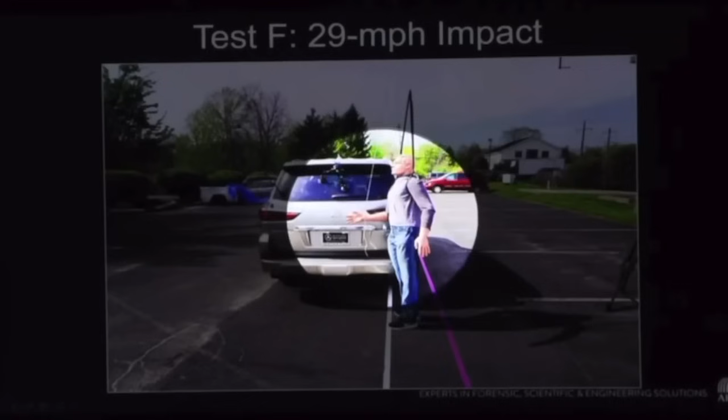Did you undertake to test a direct impact on the body of the ATD in this test? Of the rescue Randy dummy? Yes. What are we looking at here? So this is the intended impact configuration with the rescue Randy suspended here by the forklift, and again, kind of in the path of the profile at that right rear corner. How much does this test dummy weigh? Approximately 200 pounds. Next slide, please.

What are we looking at in this photograph? So this is a video. We had a little bit of a false start, so our high speeds weren't triggered, but thankfully we were able to pull our surveillance video to get at least an overall video of the test taking place. Did you intend to have high-speed video just like you've had in every other test? Yes. What went wrong? Just miscommunication between the driver and the rest of the test engineers. Got it. So false start.

Okay. Was the taillight housing reassembled for this test? Yes, it had a preconditioned new set of taillights on it. And other than the taillight being damaged several times, was there any other damage to the rear of that exemplar vehicle? I'm sorry, can you repeat the question? Sure. Other than the taillight damage that you rotated through in your testing, C through F, was there any other inherent damage to the lift gate that existed when the exemplar vehicle was received by you? When it was received, no. It was in good condition. No defects or damage were noted. Okay.

What are we going to expect to see in this video? So in this video, you'll see in the surveillance video, the Lexus will come from the right to left, strike the rescue Randy, and then you'll see the rescue Randy projected and slide on the ground. Okay. Can you play that one more time, please?

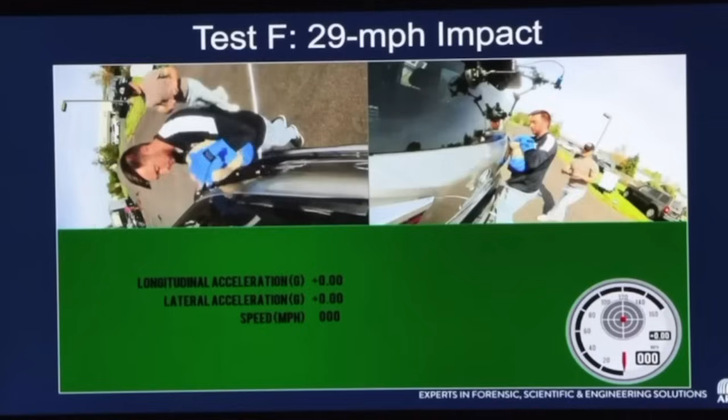That was my question. The blue, that's dry ice, gloves? You don't want to touch dry ice with your bare hands. So he's wearing gloves. He's capturing the thermal images now.

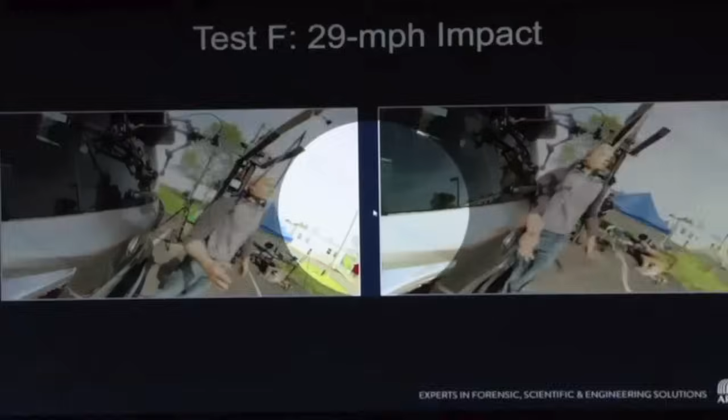Next slide, please. And what are we looking at in this? So these are extracted frames from that video you just saw from the data acquisition system. So on the left here is just before contact between the test dummy and the Lexus. On the right is just at contact.

Next slide, please. And what are we seeing in these series of photos? So this is obviously during the collision sequence. The body now has loaded into the lift gate and the back window. What you're seeing here is the back window shattering. And this is just a few split seconds later in time where, again, the body is continuing to move with the vehicle as it's contacted. Next slide.

And what is this? This depicts the post-impact damage to the rear of the Lexus. As I noted, the rear window is completely shattered. There's deformation and crush to the liftgate section of the vehicle. The bumper step was popped out, and then there was some minor fracturing in the bumper cover at the lower level.

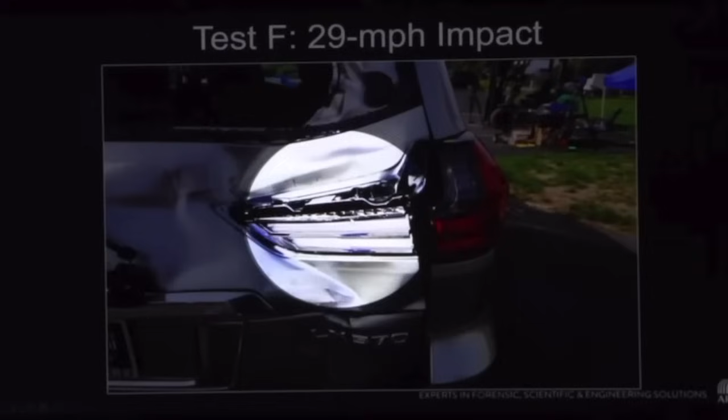Did you note anything regarding the internal components of the exemplar taillight, even at this direct impact? So the taillight, as you can see, it blew out the outer lens cover. I believe part of the clear diffusers were actually still in place. I think the lower one might have been fractured here, but I think the upper one was still in place.

Dr. Wolfe, you conducted tests at what miles per hour? Tell me the sequence. It would be 10 miles per hour, 17 miles per hour, 15 miles per hour, 29 miles per hour, 24 miles per hour, and then a full-on hit at 29 miles per hour. Regarding all of the tests you conducted, what did you observe with regard to the damage, if any, to the internal components of the quarter panel taillight? And I'm talking about the chrome pieces and the diffusers. It was less in all of the tested taillights than that of the subject taillight.